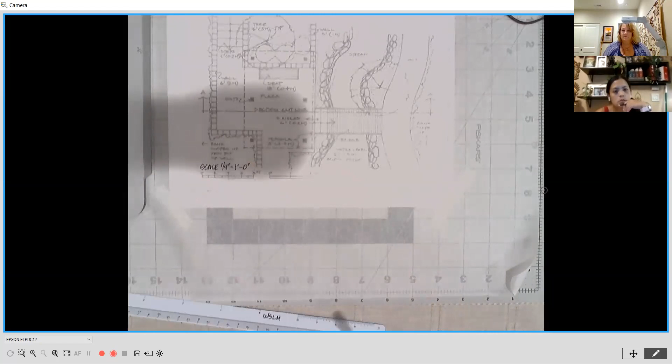So then I'm going to create a series of scaled lines that's going to create a grid down below. This is going to make it so that I don't have to measure every single thing, how tall it is, to draw.

So I know the limits of my paper from here to here, so my grid can kind of stay in that general area too. Below the paper, hopefully you guys have a little more working area than I do, but I need to stay within the camera frame. So I'm going to start drawing my grid right at the bottom of this, and mark about 10 quarter inches, or 10 feet, to draw in my grid.

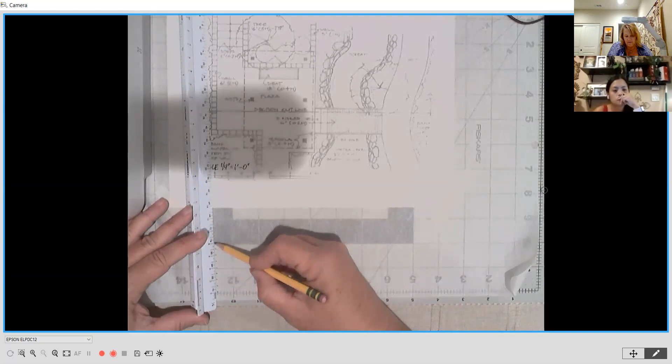So I'm just taking my scale and measuring, counting off the different feet up to 10. There. And I really wish I had my rolling glider, but I don't.

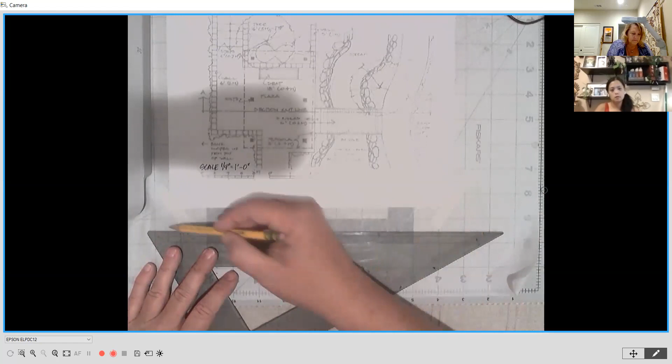Luckily I have a grid behind my paper, so I can have somewhat of a straight line, but you should be using whatever parallel edge you have. I'm going to create this grid by simply creating lines along those edges, hopefully parallel lines. Okay, if you can kind of see that.

A lot of times we'll set up these grids just for our first pass through. We might set these, move them onto a separate sheet and then put an overlay on it. You don't have to have a separate overlay for this assignment since it's the first time you're going through this. But in an office, sometimes we'll set up a grid and then draw layers of tish, the design actually on layers of tish over the top of it, so that we can just keep layering and refining how the graphics look.

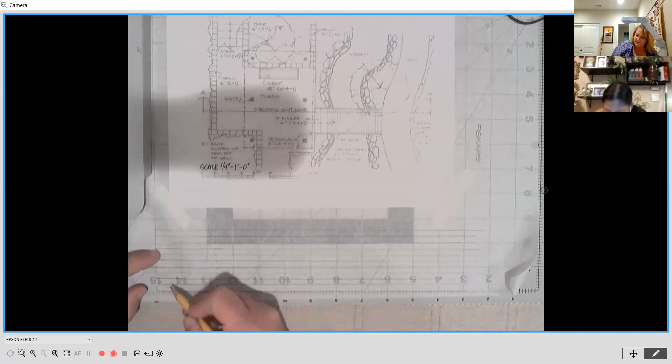So you can see I have about 10 different grids, all about 1/4 of an inch apart. I'm going to keep those in pencil. Those are really a guideline.

I'm going to go ahead and about the fourth line up or so, I'm going to call that 0 foot elevation. I'm going to say -1, -2, -3, and then above 0 is 1, 2, 3, 4, 5, 6, 7. So just kind of pinpointing which elevation I'm at.

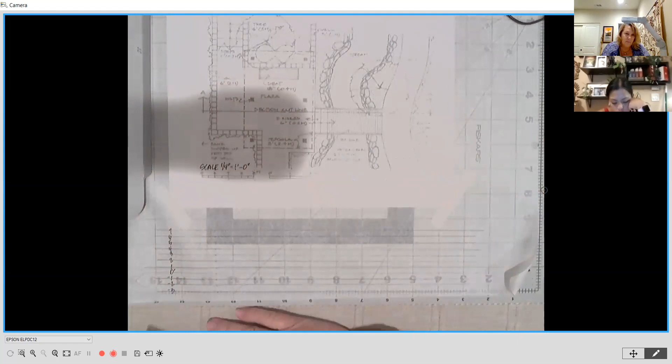I can see that I'm not really given spot elevations on this. If I were working with an actual survey, it might give me a spot elevation. It might say that this plaza is 327, so that would be my middle line. And then part of the design goes up these stairs, and part of it goes down these stairs over here. So I know I'm going to pick a middle elevation and make a few go up and a few go down for this particular thing.

Sometimes we see elevation in feet above sea level, but in this case, we're not given a starting elevation, so we're going to assume that our plaza is 0 elevation.

Okay, and you can hear my neighbors taking their trash out tonight. Isn't that great?

So when we work in elevation, one of the first things we're doing is focusing on this cut line right here. See that on our plan, right? That's our section cut line. It's kind of clearly labeled on this one. So I want to focus first on what this line cuts through.

Because I'm drawing a section in the same scale as this plan, I can simply pull the lines down from the plan above, which is a nice feature. If I was drawing another section, I might have the plan to the side and have to measure each of these and then translate that measurement down here. But for now, I know I'm on the 0 line.

And now I'm going to kind of pull down a line and back. I'm just going to run my triangle across, and make guidelines of these different lines. So I see the outside of the wall, inside of the wall.

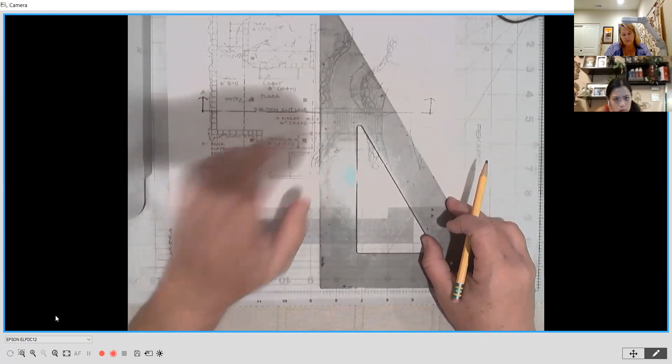I'm going across the section. I'm really just focused on hardscape right now. Now I can see where this, oh, actually I see this patio cover, the edge of that.

I'm just going to bring a quick guideline down for that item. I'm not worrying about where it hits here, just bringing that information down. Here's the outside edge of that overhead, the other side, so I'm going to bring that down. I'm actually going to bring down the center line. Well, no, I'll worry about that later because we're focusing on the section line.

Then about 6 inches past the edge of the overhead, you can see that the first step down occurs. So you'll see that little dot on the arrow, down arrow going down the steps. So that's the edge of my patio and the first riser of the steps. I'm going to bring that line down.

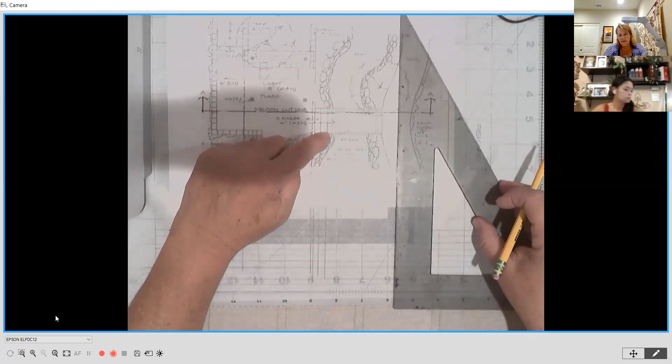Again, these are rough guidelines, just trying to translate the information from up above down into the section below. This is my second riser. My third riser right here. Then I've got this little bridge. So the third riser comes down to the bridge, and then the bridge ends over on this side.

I'm going to bring that information over. Again, I'm just focusing on that cut line right now. I've got this walkway, I'm going to bring that line down also. Underneath this bridge, I actually have the edge of the bank, so I'm going to bring that line down too.

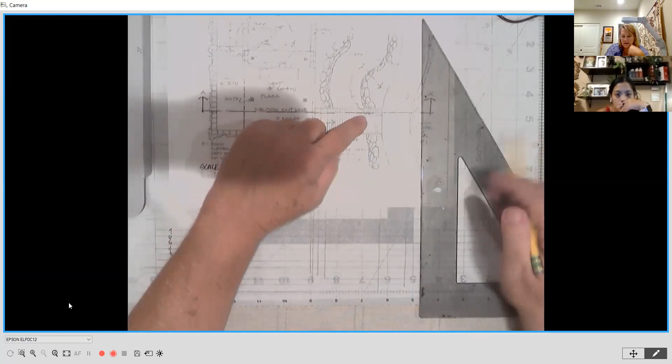So first I'm kind of going through this, but this cut line also comes right at the edge of this bank, rocky bank. So that's what I'm bringing down on each side of the design. I'm really just trying to figure out where it's going to cut that section line. So I end up with all these little lines brought down onto my paper, and those are going to drive getting how this elevation changes through this design.

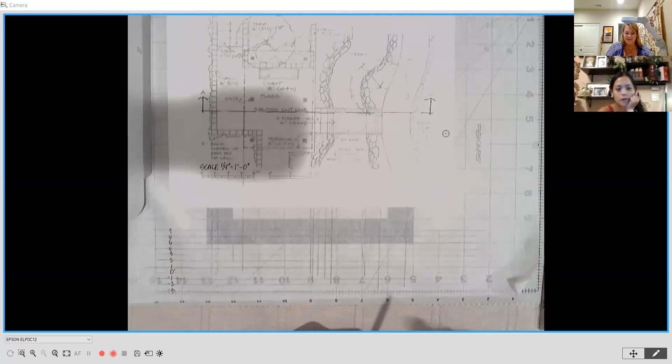So are you following along, or do you want me to just run through it and you're going to watch the video? Oh, I think you're muted. No, yeah, I am following along. I'm okay, like trying, I will play through this again because I'm trying to understand. I can't just do it as you talk. Yeah. No, I didn't want to zoom through the whole thing. So I guess if there's anything unclear, it's a good time. If you have questions, I know anybody else from your classmates who watches this will have questions. Yeah.

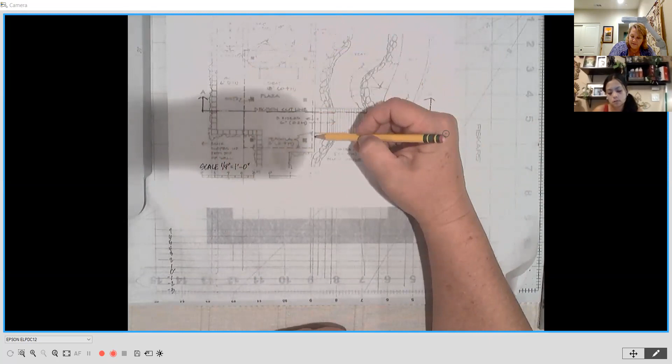So again, we're just using that section line as a guide and really coming through and marking every end, the inner and the outer edges of the wall. We've got the outside of the overhead structure, and this is a typical symbol for an overhead structure, this dotted line. Then we're going to catch the other side of the overhead structure and the first riser, or the edge of the patio, second riser of the stairs going down, third riser going down, edge of the bridge we brought down, edge of the walkway.

And then we kind of came back and realized this bridge goes over this bank, so there's kind of a couple layers. We have the edge of the bridge and the edge of the bank. Edge of the bridge, edge of the bank. So those are the different lines that I've carried down onto this grid down below.

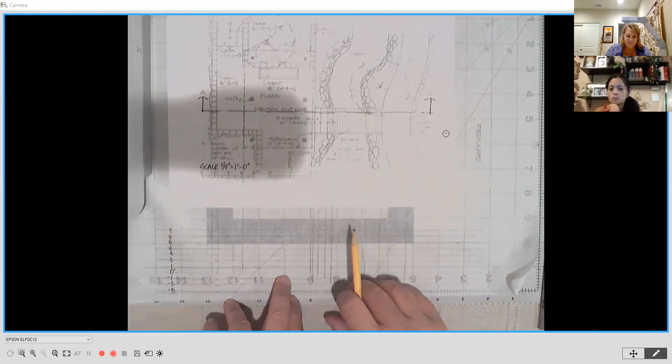So from that, I can start to kind of set the elevation. The first piece, I've got a callout that says this wall is 6 feet high, so I know it's starting at the 0 layer and it's 6 feet. So I know the top of the wall is going to be about there. I'm going to use a drafted edge, and hopefully you guys have a better setup for your parallel bars, bringing that right down to the 0 line on my grid.

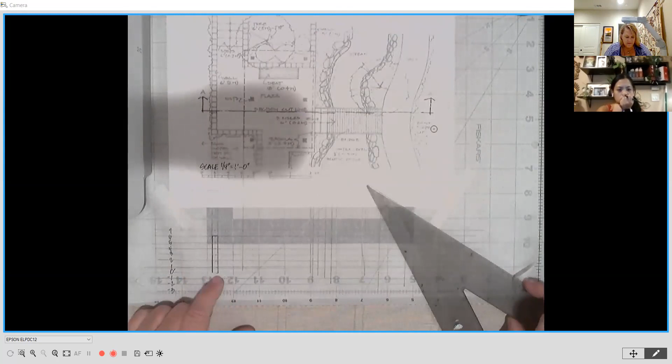Right, so there's my wall. My plaza comes nice and level all the way over at 0 elevation. I'm going to go all the way to this edge, so I've got the edge of the overhead, but then also the plaza. I'm not going to worry about the overhead for the moment.

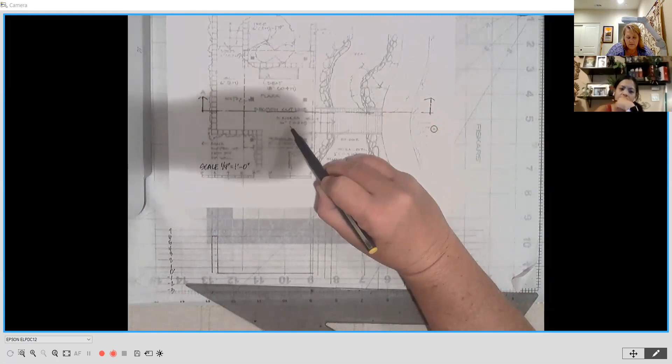Each riser is 6 inches deep. So I know this is my first riser, and I know I've got a grid that is set up for one foot, so I know my riser is going to come down half of that grid. All out of alignment.

Go ahead and take that down. Rock it around.

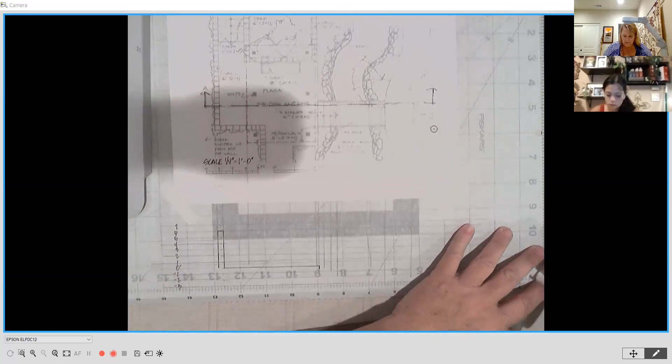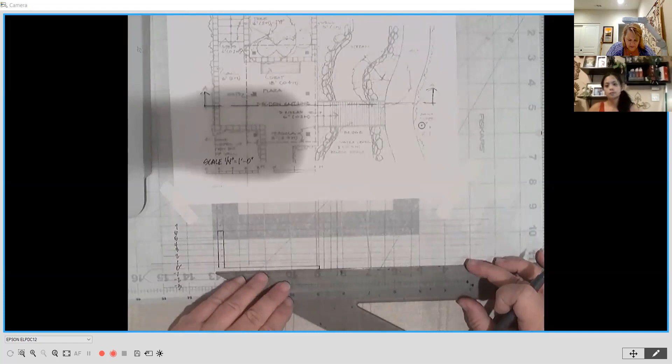Okay, good idea to have the top layer taped down, not like I just did. You can see I got that first top of the riser. It comes down half a foot, or half of the length of one of these grids, and then it comes over for the step to the next line. That one comes down 6 inches again, over to the next one.

If you have old eyes, magnifying readers work really well for this kind of work.

Now I'm going to come down. I have my third riser, right? 1, 2, 3. So here's the last top of the riser. 1, 2, 3. So this one's going to come down half a foot again, and then I come over onto this bridge. So I'm going to worry about the edges of the bridge first.

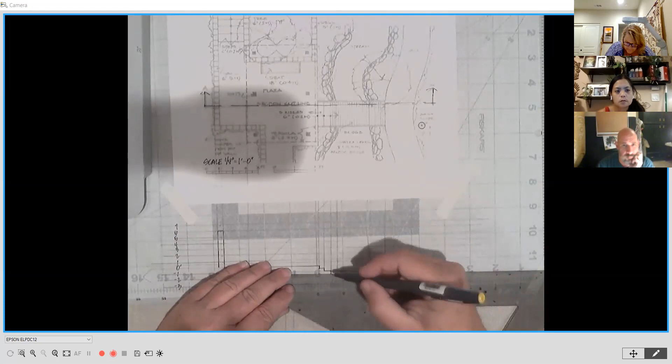I'm just kind of roughing everything in, and then I'll come back and put more detail on them. And then this bridge is flush with this walkway. You carry that line over.

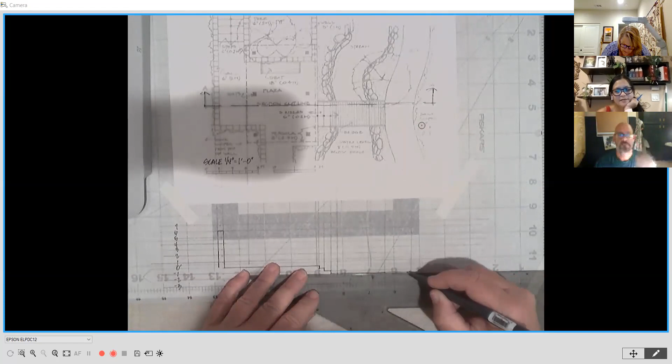Again, you should be using a parallel bar, glider bar. And then we've got a 2-to-1 slope up here. So what that means is for every 1 foot in elevation, it goes over 2 feet. I can kind of mark that and plot that out. You can see that's 2-to-1 is labeled up in here.

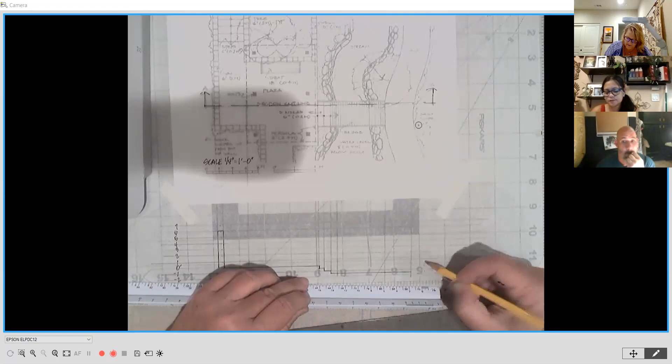Okay, so I could go over 2 feet and just mark it, and then say okay, now I'm going to go up 1 foot. So halfway between these next, I'm midway between these grids, and I'm going to go up between the next set of grid lines over. And I can just rough that grade in, that slope in, something like that.

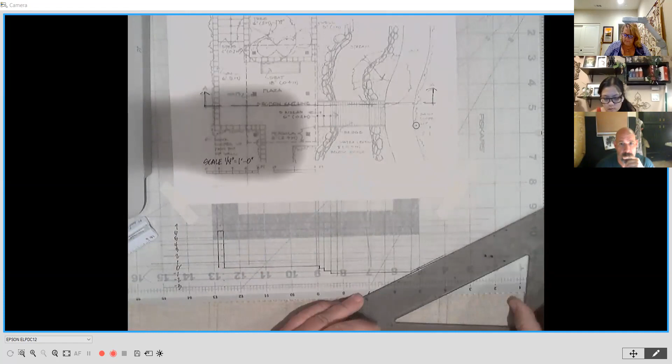Right, so this is a 2-to-1 slope. That means for every 2 feet over, it rises 1 foot. So I got that. Okay, so now it doesn't give me what the elevation is over here behind this wall.

I just see there's some little shrubs. So I could make this either low, and this is a big privacy wall, or I could make this a little retaining wall. It's up to me. It's some choice in there. I'm gonna make it a little retaining wall because I just think that's it. I know that we're dropping down in grade behind, so maybe I'll make it lower.

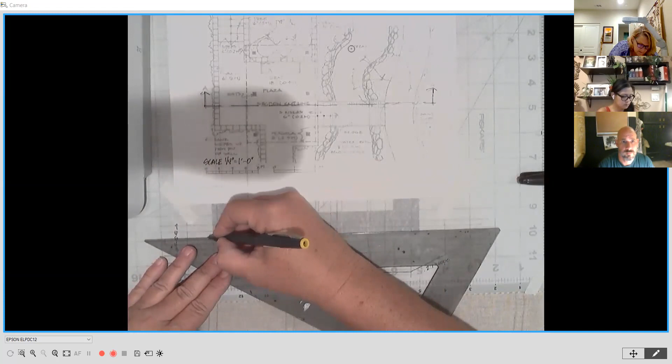And usually when we have soil behind a wall, there's an area called a bench, that is flat, so the wall doesn't slope directly into it. It has a little flat area, and there's usually drainage in that area to keep water from pushing that wall over. And I'm just going to darken.

Normally in section elevation, the line where the earth is, is usually your darkest line. So it reads very bold.

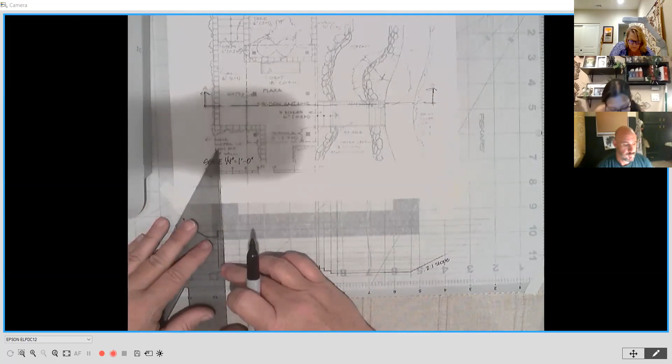There's two ways to do this. I'm going to use the outside edge of the wall, but some people actually come around the wall and the footing down below. It's more of a personal preference thing on that one.

So I'm just going over the lines I already drew with my thick Sharpie marker to make a more bold articulation of this part of the plaza area.

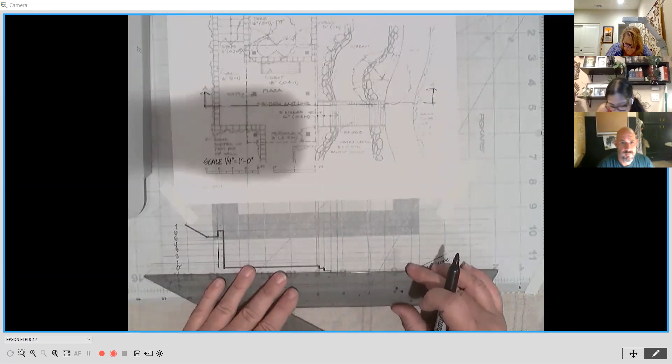Now, when I get under the bridge, there's also that lower bank. So if I look at the notes on the bridge, I see that the water level is 2 feet below the level of the bridge. So I can measure that. This is going to be really tight for me. So there's about 2 feet down below the bridge.

And I also have those lines where the edge of the bank came in with the boulders. So it might actually look something like this. Right, same with over here. There's these kind of boulders defining the edge of the bank.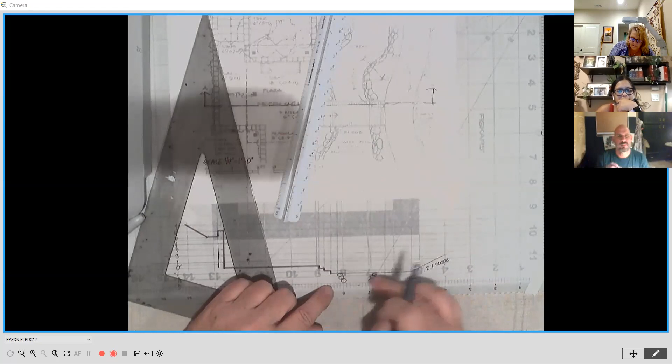That's because the bridge floats up above the actual earth grade, so I might have something like that. Should come down, touch my bottom. This part might look like this.

And so you start to see how that grade starts to really change throughout this section. And that is the strength in using sections for graphics. It's really in illustrating how the grade might change.

So I also want to float my little overhead structure. It doesn't give me a height to that, does it? Oh, it says 8 feet. So it is 8 feet off the ground. So here's my 0. We went up to 7. So I'm actually going to make it slightly larger, and add another foot to it.

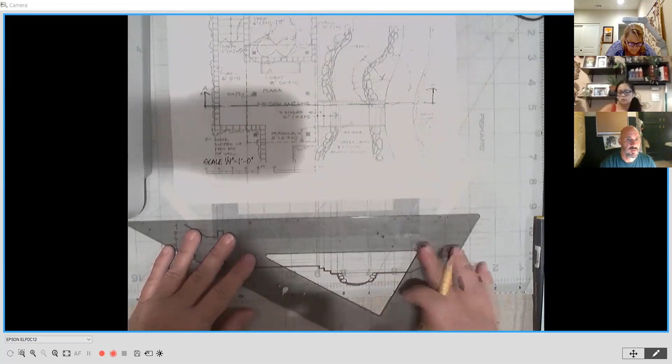Right, and I can see my edges go from here, where I brought the line down in the middle of the plaza, to this side over here, right before my steps start to go down the risers.

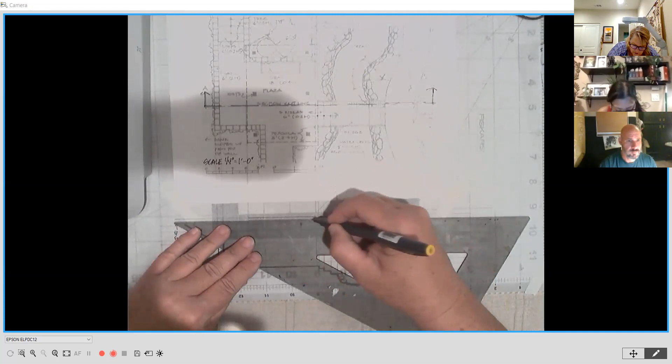Now give this a thickness. Maybe it's a 4-inch beam. And right now I'm just have it kind of floating in space, because we haven't hit elevation to get the columns to it yet. But there would be like kind of the top of my overhead on that space.

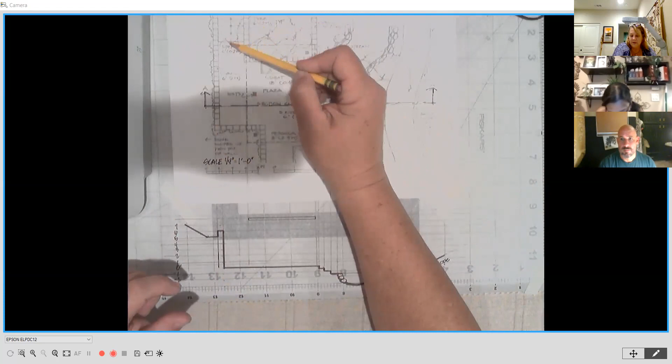We're starting by setting up the plan view in a working area up high, creating a grid at a quarter scale, which is what this plan is at down below. And we've just gone through cutting through the section line, the actual cut line through this space of this little plaza. There are stairs coming down - we know that because there's an arrow pointing down and little dots on each riser. And then another set of stairs down here to this bridge, which crosses this little stream to a walkway. So we're just looking at how these elevations change through this space.

Okay, so the first pass, I usually set it up to pick up the hardscape and hard elements on the section line. If I had any planting, I would go back and pull up any places where this section line cut through the center of plants. So it cuts through the edge of this tree, but this tree is really beyond the section line - we call that 'in elevation.' Same with this plant material. So I don't really have that second pass on the cut line.

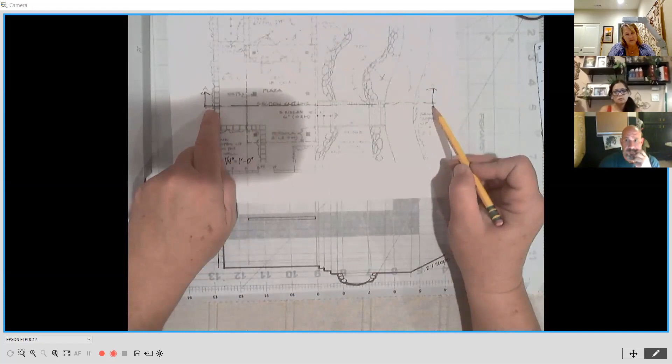When I'm doing these in the office, I normally take hardscape elements and pull the grid lines down in red, and the plant material grid lines down in green. But this is a pretty simple space, and if I use red and green, you'll never see it on camera. So anyway, that's how we came up with this articulation.

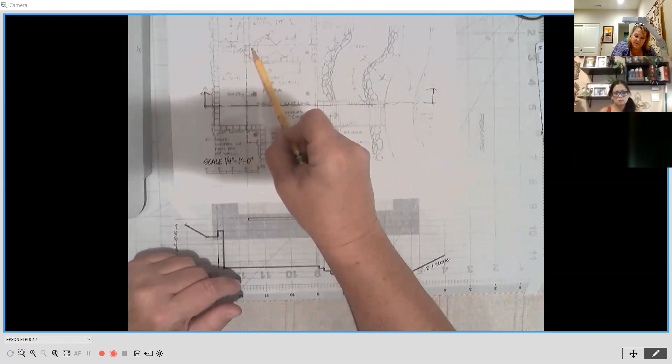And now we can really see how that grade changes through this cut line. So the next step is to look at everything that falls behind the cut line. We can see the direction we have to look because of these arrows, and start picking up elements like these stairs, this planter wall, the trees and shrubs, this little bench, this tree over here - those are the things shown in elevation. Also the columns on the pergola, since they fall behind that cut line, so we wait to pick those up in elevation.

So I'm going to do that thing. I'm sorry. Yeah, you said it's a quarter inch - that's the scale?

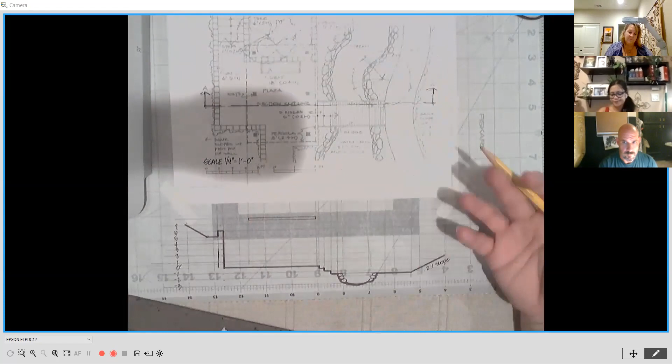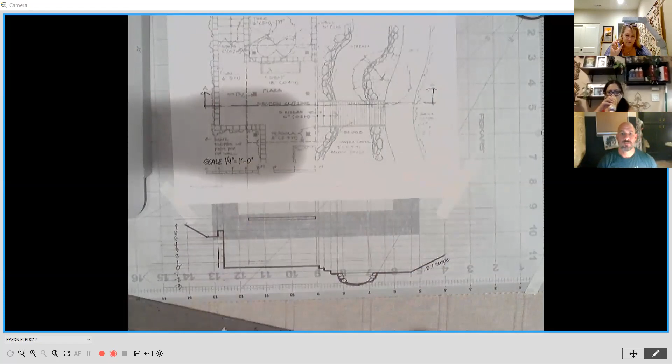Yeah, we're at a quarter inch scale. It's a little tricky because the guy who wrote the book only gave you a graphic scale. But if you were to take your architectural scale and actually measure it at the quarter inch scale, you'd see 1 inch is equal to 4 feet - so it's quarter inch scale. I went ahead and threw a written scale in here for clarity. A lot of times when doing plans, it's important to include both a written and a graphic scale. The written scale is easiest for us to read and understand. The graphic scale matters because if you scan this and send it to a contractor, and maybe you've drawn it at 11 by 17 but they print it on 8.5 by 11, they need the graphic scale to know it's not to scale anymore - it's to a scale, just not a measurable one, since the scale has changed. So it's good to have both on your plan.

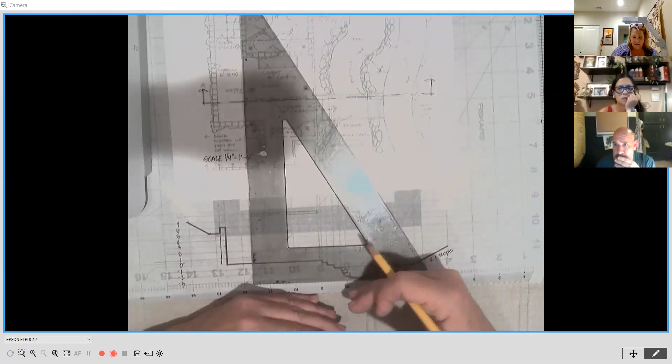So now I'm going to do that same process. I've already got the edge of the wall here, so I don't have to worry about that, but now I'll pick up this other edge of the planter wall. Again, on the first pass I'm just pulling this down. If I had a parallel bar, I'd rest my triangle on it, but I have this little grid thing that's helping me keep straight. Normally I'd have my little rolling glide down below, but I must have taken it to work and couldn't find it tonight. So I'm just pulling these rough guidelines to mark the edges of this wall, and picking up the hard elements here - coming over to the edge of the bench to grab that one.

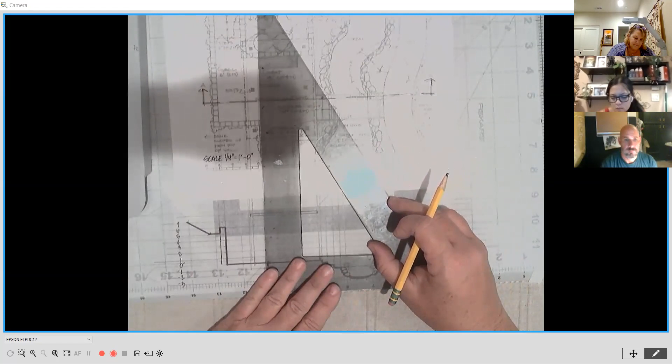Again, doing these kind of in a light pencil. Your blue pencil works really well for things like this because it doesn't reproduce. Now the edge of the wall lines up with this edge of the patio where the riser drops down.

So I don't need to pull that line down. I've already pulled my rocks over when we did the bridge, so we're already showing those. We assume they go straight back, they don't start getting larger. We don't have enough information.

But now we can go and pull the center of these trees down. So we've got a tree right about there. All right, we've got another tree here. Again, just doing rough guidelines now, and then I'll set the heights of these.

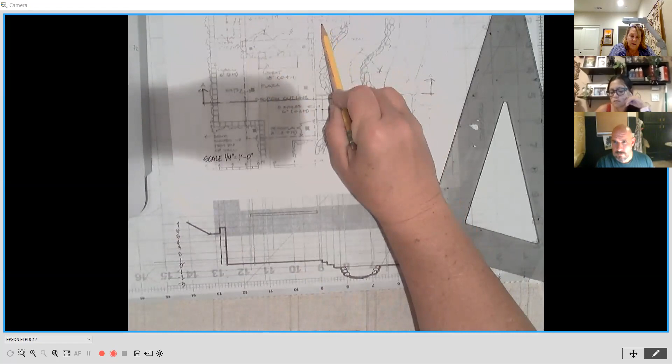So I see a call out that tells me this wall, this little planter wall back here, is 3 feet high. So I've got my little grid. I'm at 0, so I can simply count up to 3, and I can draw my wall in there from edge to edge. 1, 2, 3, and we are here.

So if I'm drawing this in section, I'm looking at the wall. I'm not necessarily- this is kind of an inner curve, right, so it's all going to look like a wall face to me. So I'm actually going to draw this line from the outer edge of this wall to the outer edge of this wall, and it's just going to be like a solid panel of block or stone or whatever I choose to put on that.

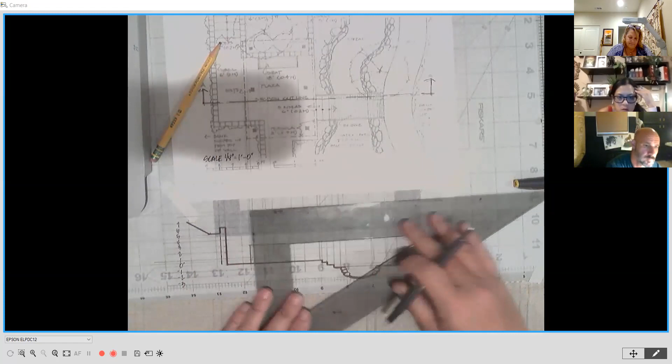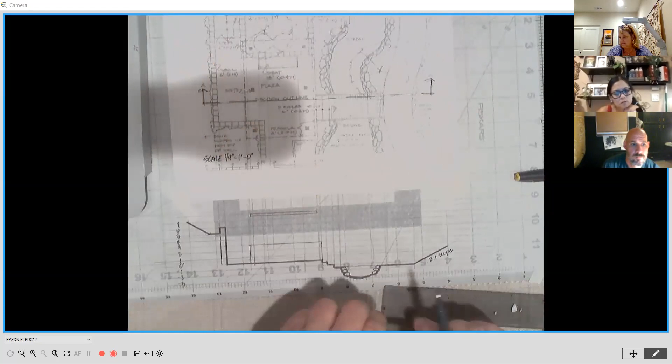So in section, you see we start using line weight still, and the things closest to the section line tend to be a heavier line weight. That's why one of the reasons we do this section line so dark. And as things fall back, they tend to be lighter in pen weight. We've got our wall in.

Luckily they gave us the height for a bench- that was nice of them. It's 18 inches high, that's pretty typical. It's about 15 to 18 inches, depends on if you're hitting ADA criteria or not.

So we really have our grid, I've got my edges marked. So it would be 1 foot plus half a foot- we did it at 18, right? And there's the edges of my bench, so that's my seat height. And I might rough it in, maybe I want to make it kind of decorative.

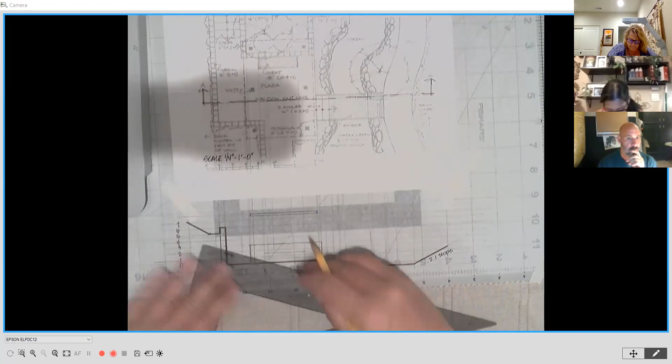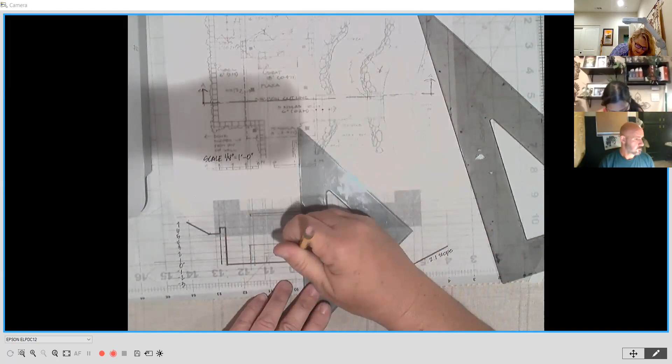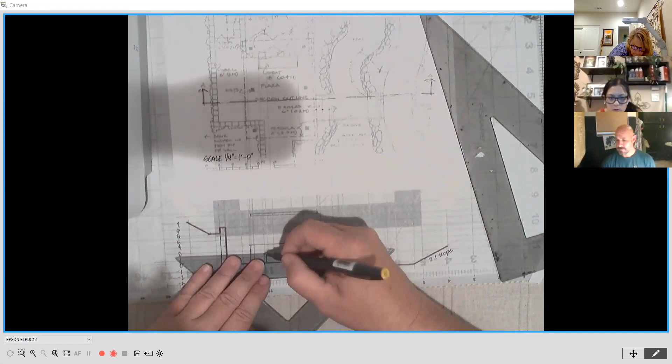Now maybe I'll make it a very simple space in here. Yeah, if I wanted to put a back on it, it would come up about as high as the wall, maybe a little bit lower. Darken that up a little bit. A little bench in there.

I want to work on the columns. I forgot to bring those down. Work on getting those in there. Again, I'm going to go right through the center of the columns and just mark the center line, and then I can make them bigger down below.

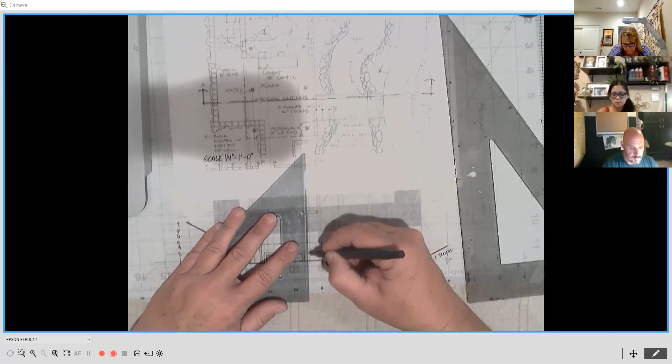Something like that, a little cockeyed, fish- too bad. So I've got my overhead, my wall behind, my bench. I need to put my steps in. So back here, I can say I have 4 risers coming down into that space.

Each riser is 6 inches high, so I can simply go off of this grid- I've got my edge of the wall- and every half a foot, since each grid line is 1 foot, I can mark my step. And I'm going to go up 4 steps, 4 risers, something like that. Back here. Now let's see.

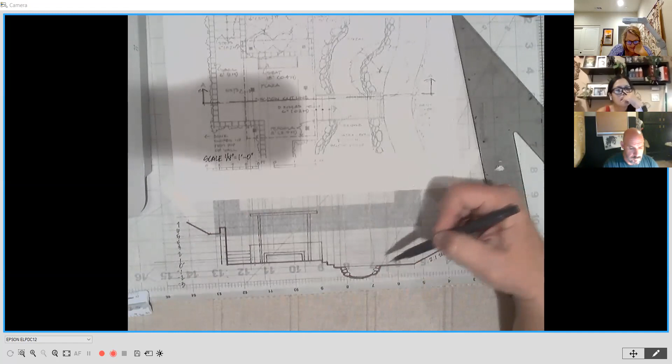The last things we've got to put in are the trees and the shrubs. So I didn't pull these shrubs down, I'm just going to kind of spot them in. I can see that they start about at the edge of the bench, so they're a little bit asymmetrical, right? There's a little gap right here, and then this tree falls right behind it.

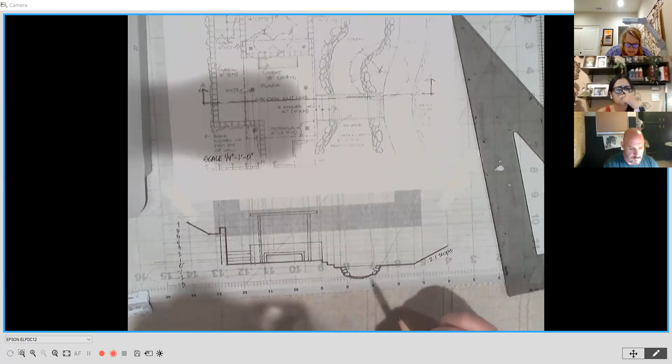So this tells me on my plan, the tree is 16 feet high, so I will actually have to measure because I don't have a grid that tall. And I'm assuming that maybe the planter drops down maybe 6 inches behind the wall, so the base of the tree probably starts there. And I'm going to count to 16. Right, so it's kind of a tall, skinny tree. Rough it in.

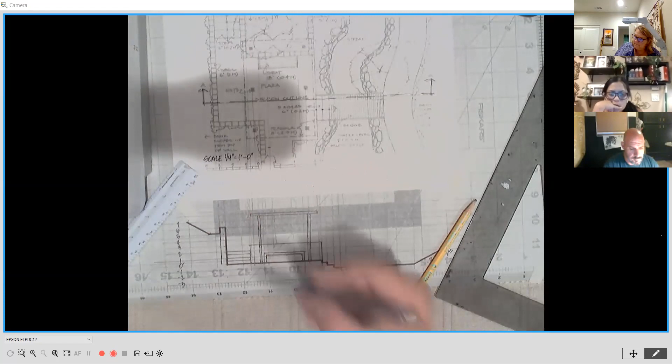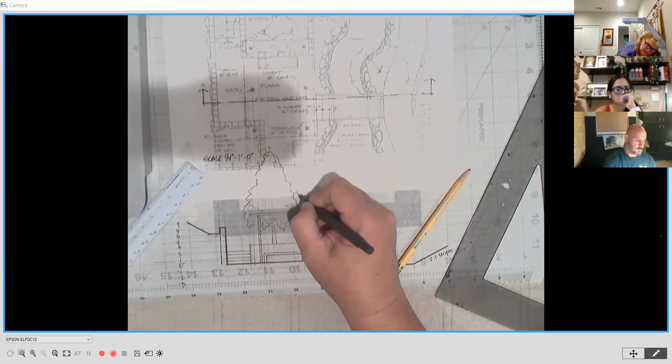I'm roughing it in pencil first. I keep this pen weight kind of light in the back because it is a bit far behind, in the back of the elevation here. Full detail on it. That tree in there.

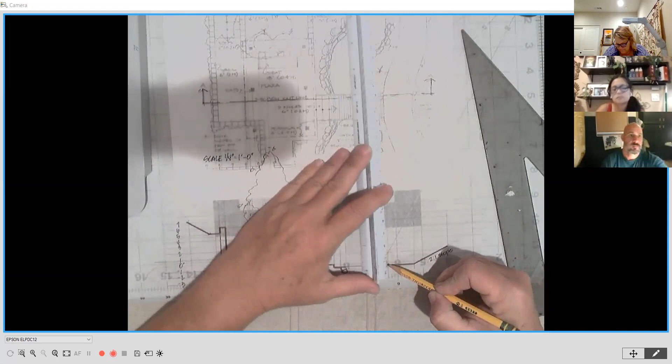And so I have another one over here, I'm going to make it the same kind of species. This tree, it's the same as this one, so say it's also 16 feet high. It's sitting lower because it is down here by the riverbank. So I would measure again, right from the ground line to 16 feet.

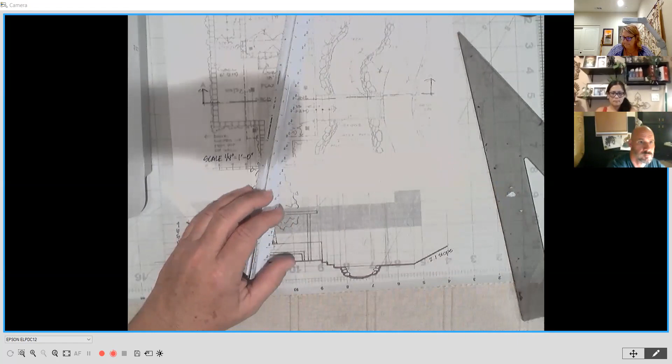Now this one is a little bit closer to me, so I could actually come through and make it a little bit darker or more bold line weight along it if I wanted to, with some of the detail. There's a little more detail than the other one.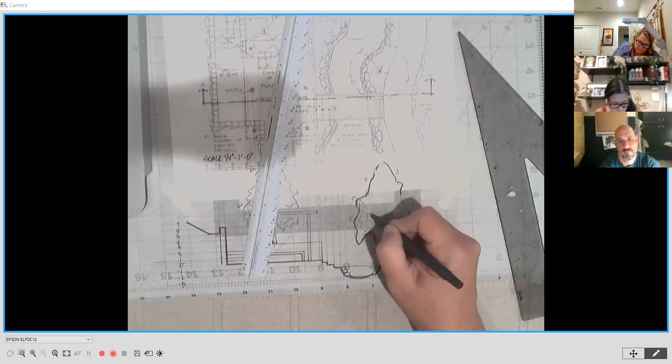Great, and the second to last little thing is some little shrubs over here. So you can see this is exactly why we tend to draw in layers. It's really easy to be like, oh, I should have left that tree trunk till the end. So we'll tend to roughly draw it out first and then redraw it later with a layer over it to really fix some of these layering issues, so I don't show a trunk right through the middle of my shrub. The column could go through because it's in front, so that's okay.

Shrubs through here.

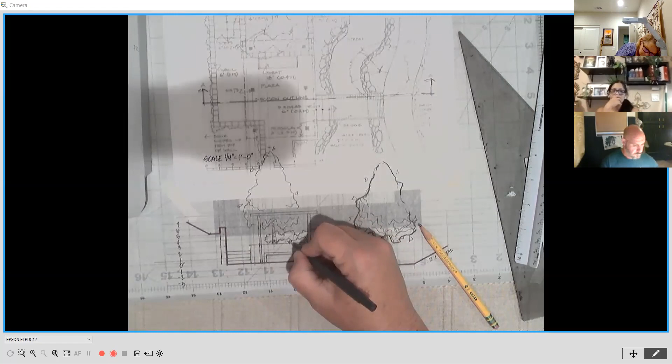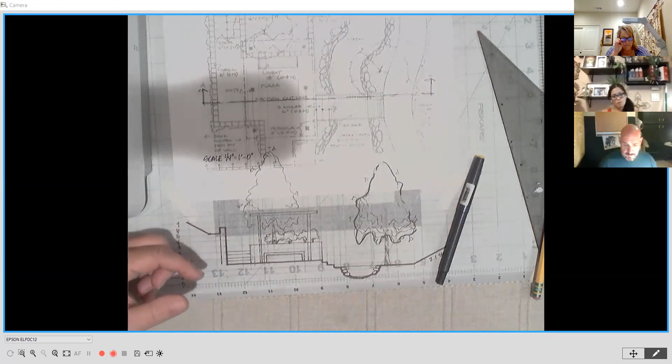Then it's always nice to put a person in your space, because that's going to help people understand how big the spaces are. So this is a very human scale design. And when we draw people, we tend to draw them either 5 feet to their eyeball or 6 feet to the top of their head, so I tend to draw these little kind of cartoony, bubbly guys.

Double check my thing. So here's 6 feet, right up to here. So this would be like a dad.

You might just do a simple guy shape. My students in the past hate drawing people, so I've given you some entourage, which is what they call the tracings with different scales. So you're welcome to kind of trace a person behind it.

Professor Landis, can we do something like this for our people? Yeah, you can make them as stylized as you want. Yes, okay, absolutely. So however you want to draw it.

But now I can start to see how big all these spaces are in comparison. If I wanted to do like a little child, maybe there's a couple kids down here, maybe they're like 3 feet high, maybe the kids are down playing by the water.

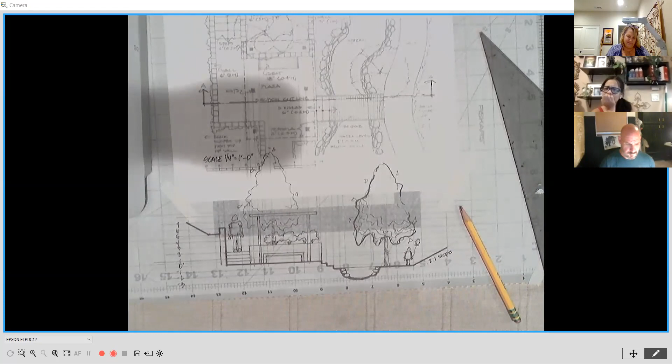Yeah, a little balloon. I have one teacher who always made us put a balloon in every drawing we did. So anyway, maybe they have this lovely backyard. They live in Montana and they have a creek that runs through it. It doesn't flood. So anyway, that's kind of the section elevation.

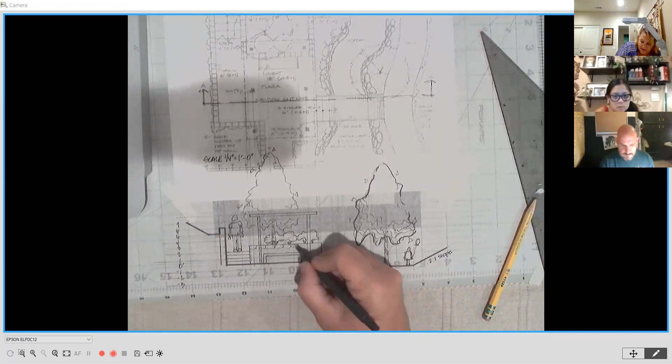A lot of times I'll take time and start to use a real light pen weight. I can start maybe adding stone to this wall or brick, start adding a little bit of detail. I might color it, especially if I'm doing a rough pass on my concept design and I'm intending to show my client some of the rough, early kind of concept work.

And this is kind of like a rustic Montana, out in the Pacific Northwest or something, stone. Big, kind of rough, not refined cut stone like you see in Southern California. Put more stone here just to show, oh yeah, I want the walls in stone. It starts to give them some sense of the design.

Probably I'd put some shrubs on my slope, just kind of rough some things in here. Same over here. Oh, I've got my stone underneath the bench. Gotta have that.

Yeah, I want my bench to stand out a little bit more. It's trying to get lost in the stone.

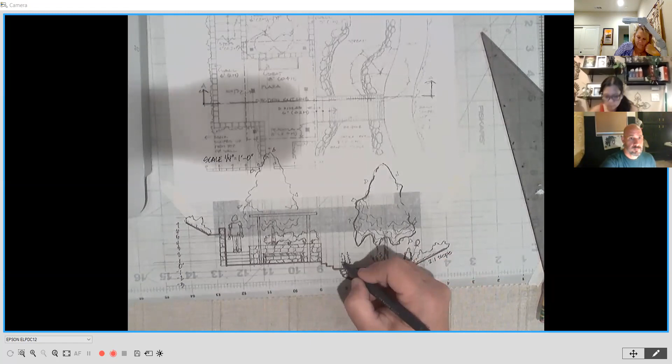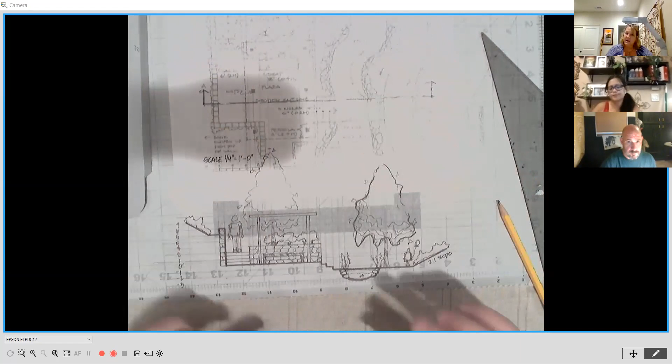Can play around with it a little bit, but that's kind of the process of a section elevation. You can see it starts to bring in those different skills. So you've got to understand scaling pretty well, drawing, understanding plan view and what's happening in plan view, and how to read the drawing, and then start to translate some of that to section, how these trees might look in the other view. So, any other questions you guys have on this process?

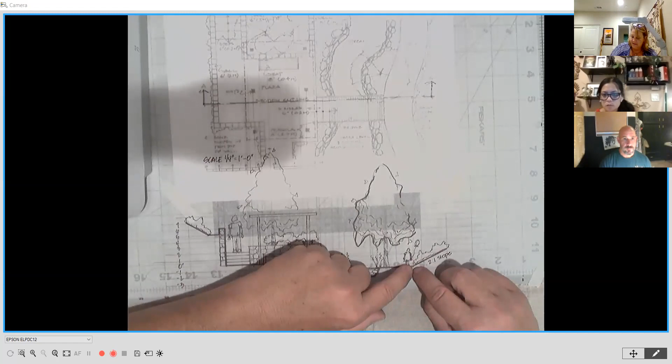Over here we're given bank slopes up 2 to 1, so we could actually plot that out. The way we measure that is measuring over 2 feet and up 1 foot, then we extend that line. So we could create an exact 2 to 1 slope to match the direction given here.

Here it just got a bit fuzzy about what happens when we get on the other side of that wall, and that's why I said you can kind of have some free choice there. But I take that back.

It tells me this part slopes up, which makes me assume this part slopes up, but it doesn't really give me that. Normally if we were working with a survey, we'd have a spot elevation here and a spot elevation here. The engineering might give us elevations, or we might have to set those if it's high-end residential and we don't have an engineer on the project. So this is somebody else's design, and I have to do some interpretation of it when drawing the section.

This is from the graphics book, and I've already filled in some gaps, like this tree height was missing, but it's the same symbol. I've marked it typical over here, meaning every time you see this symbol, it's the same everywhere. We've gone through this a few times to fill in the gaps, so I think you'll do okay with it.

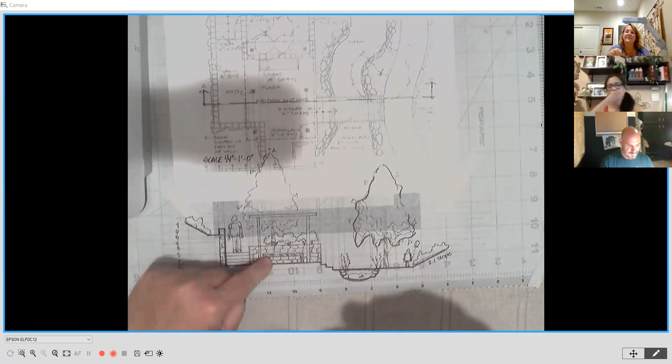Good question. I was trying to get you to laugh earlier, but you wouldn't. You were focusing. Oh, I'm sorry, what were you doing? I was messing with my glasses and my scale, hopefully participants aren't recorded for your YouTube. If so, then very good, I was goofing off. Well, it's good, humor is always welcome. The old lady glasses too, when I have the magnifying glasses on to see my line work, I lose the vision of the screen. For those of you older people, the cheap drugstore or TJ Maxx magnifying glasses are a godsend for this fine work where it gets tough to see and your eyes get tired. So don't hesitate to pick up a cheap pair and rest your eyes a little bit, if you need them.